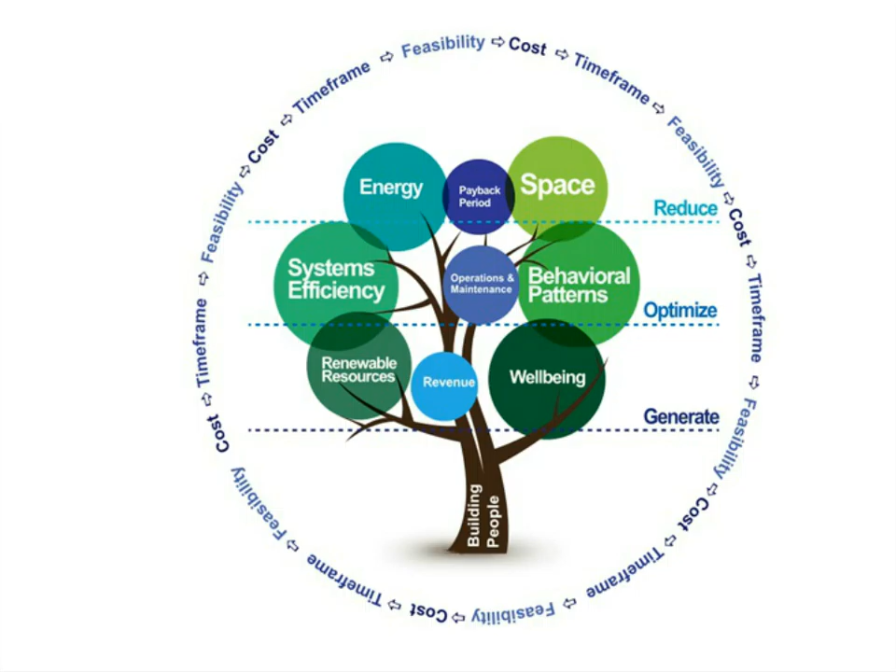Once we do that, our second step is what we call reclamation. The general idea is that once you put energy into the building, you don't want to let it out. You want to capture it and reuse it over and over again.

Once we have considered all the reclamation strategies that can be incorporated, we jump to what we call absorption. All buildings are surrounded by energy—energy streams that flow around the building, hit the building, travel underneath the building. Part of the strategy is to tap into those energy streams, draw them into the building, and use them for the benefit of the building's operation.

Once we've done those first three things, we've reduced a building's energy consumption down pretty much as far as it can be, getting it to a low EUI, energy use intensity. Once you've got that very low EUI number, it's time to explore the generation strategies—looking for opportunities to put renewable energy systems onto a building to generate power to equal or exceed the amount of energy you're still consuming within the building.

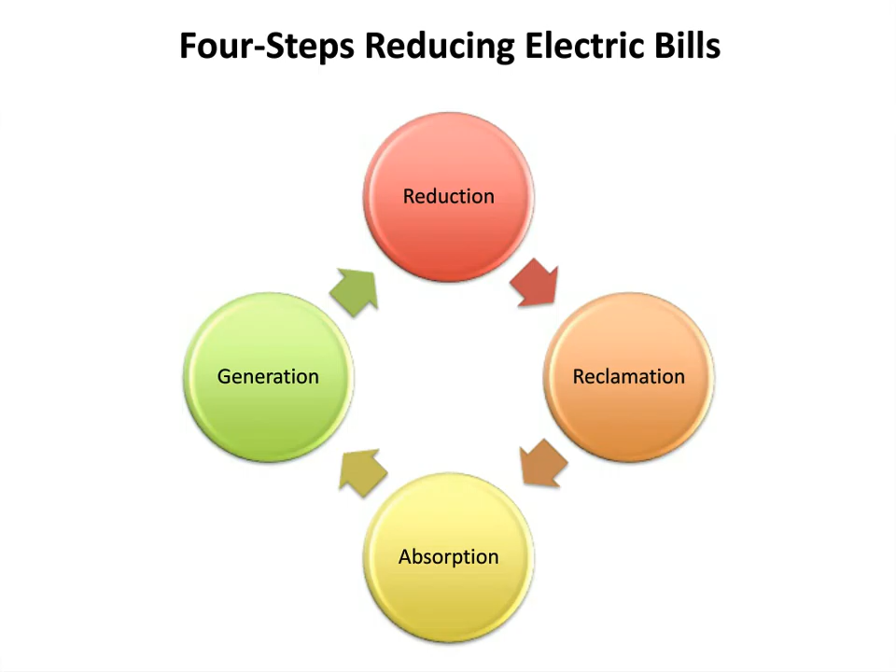So I'm going to talk quickly about one case study of where we've done this, or are doing this, locally. It is for a building called the American Geophysical Union Building on Florida Avenue.

We started the process by really exploring all the different energy conservation strategies we could think of. We started with a list of about 40 or 50 of them and analyzed every strategy independently. We even wrote individual white papers on each strategy considered, looking at everything from how much energy you could save, to what it would cost, to the availability of the products, to

competition, to other examples of where these strategies have been used in the U.S. and abroad, and eventually came down to a much shorter list of what we call our bundled strategies that would be used in the building.

So if you're not familiar with it, this is the image of the AGU building, headquarters building, which sits on the corner of 20th Street and Florida Avenue, Northwest.

The very first thing we had to do is essentially turn the building from a real building into a digital building, so that we could do a bunch of digital analytics to understand exactly how the building operates initially, and how each individual strategy considered would impact energy, water, and gas consumption on an hourly, weekly, monthly, and annual basis, to have a strong predictive tool.

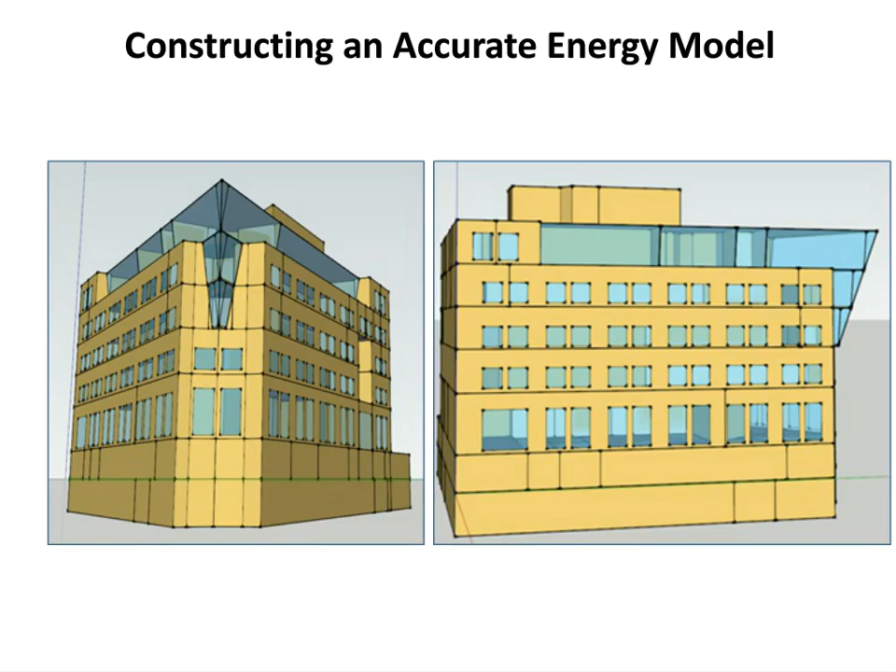So the numbers are not exact, and they never can be when creating digital models, but statistically these numbers were close enough for us to say that the real building and the modeled building are statistically equivalent.

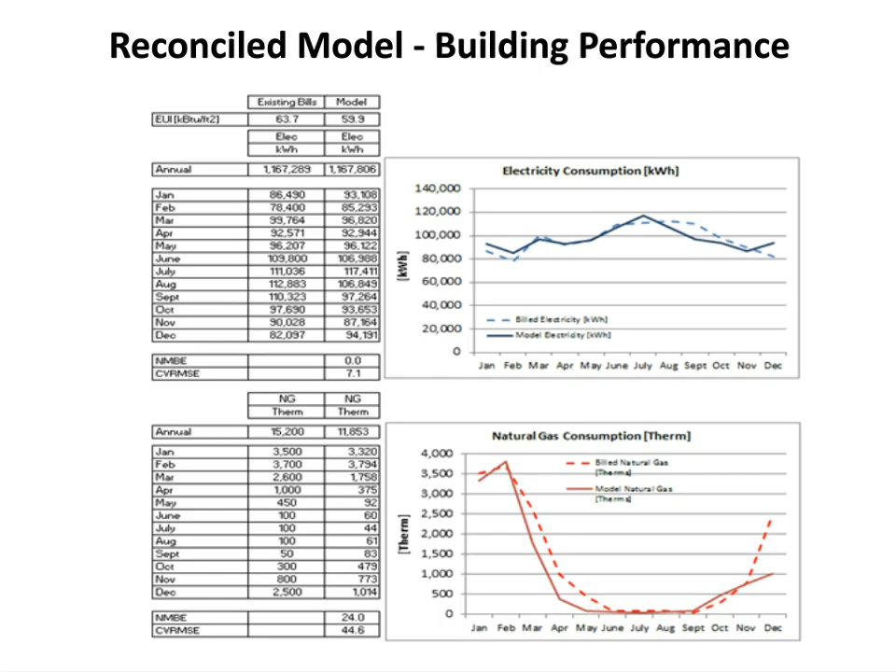So again, there is, I would say, no single magic bullet to get a building to low energy, to zero energy, and to positive energy. There's no one system you can select that gets you there. It really does take a combination of a number of different strategies from all of those four food groups I mentioned earlier: reduction, reclamation, absorption, and generation, paired together and working together to achieve that mark.

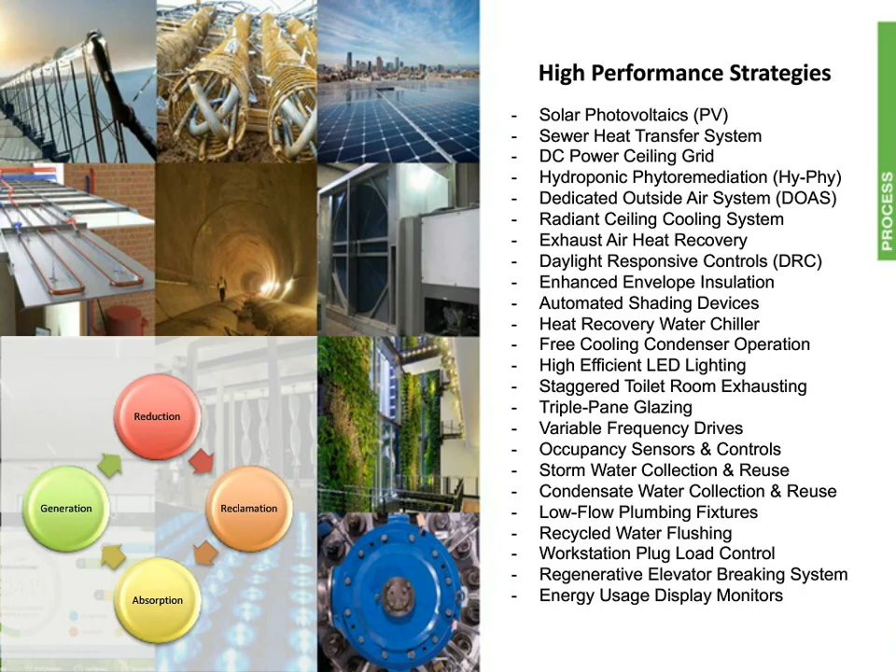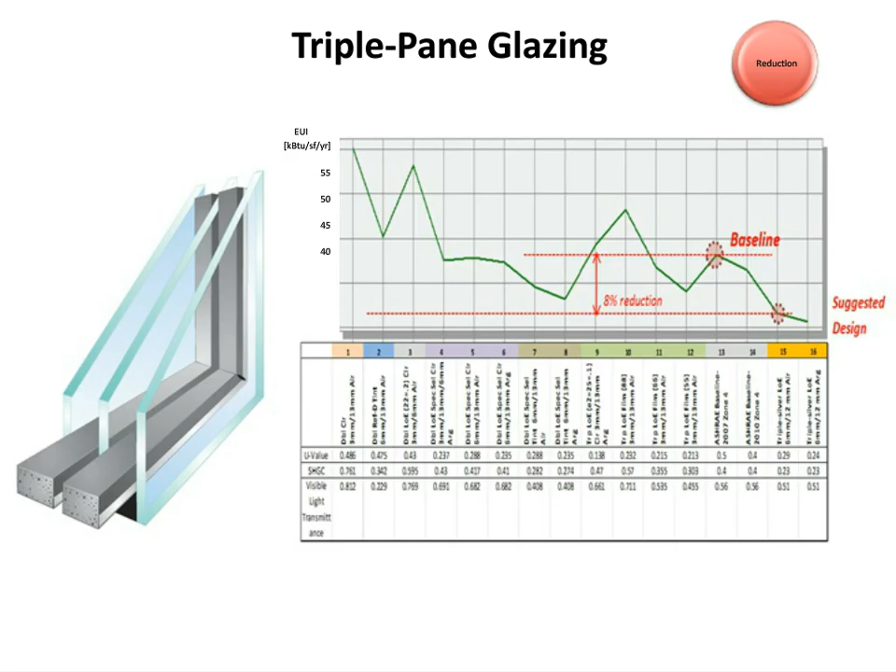So one of the first and very important elements are the windows in a building. Compared to a building's exterior wall, so much more energy is lost and transferred through the glass, so having very good glass is a very important piece of the overall approach. In this particular building, we are using what is called triple pane glass, three layers of glass with very high thermal performance and very good solar heat gain performance. That is a reduction strategy, reducing the building's energy consumption.

The next system being installed into this existing building is what's called a radiant ceiling cooling system, considered by many in the U.S.

This may appear to be a very cutting-edge advanced system. However, it's not really. It is a system that has been used very consistently and reliably by the Germans for more than 30 years, but now is being considered more frequently in the United States. This system uses water to create a cool surface for the entire ceiling plane to have a radiation exchange with people in the building, providing a much higher level of thermal comfort. It's a very quiet system, and it leads to extreme reductions in energy consumption compared to conventional air handling unit type system designs.

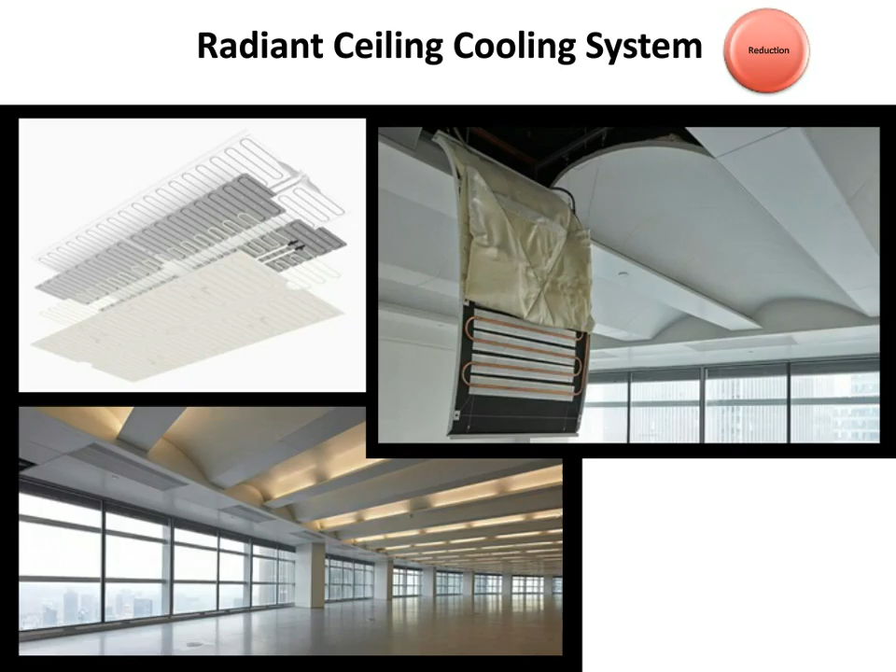Lighting is also very important, and LED, light emitting diode, fixtures are becoming very common and are used quite frequently now in the Washington, D.C. market, which is great to see. Again, a significant reduction strategy.

Within the AGU building, we are using something which is, I believe, quite innovative, and that is the grid that holds up the ceiling and holds up these radiant panels. The 2x2 grid is, in fact, electrified. We have DC current running through the grid, so all of the light fixtures within the space and many of the other devices within the building use the DC energy by clipping directly onto that grid.

The reason this is so significant is the building is also powered by a photovoltaic system, and PV, photovoltaic arrays, generate DC power. Quite often you may hear that PV has very long payback periods, and the reason that has been true in the past is that the power these grids generate, DC, needs to be converted into AC power to be effectively used in office buildings. So this approach changes that trend, where we're taking the direct current from the photovoltaic cells directly into the building and using that power directly into the light fixtures and other devices without having to go through that transformation and all the energy losses associated with converting it into AC power.

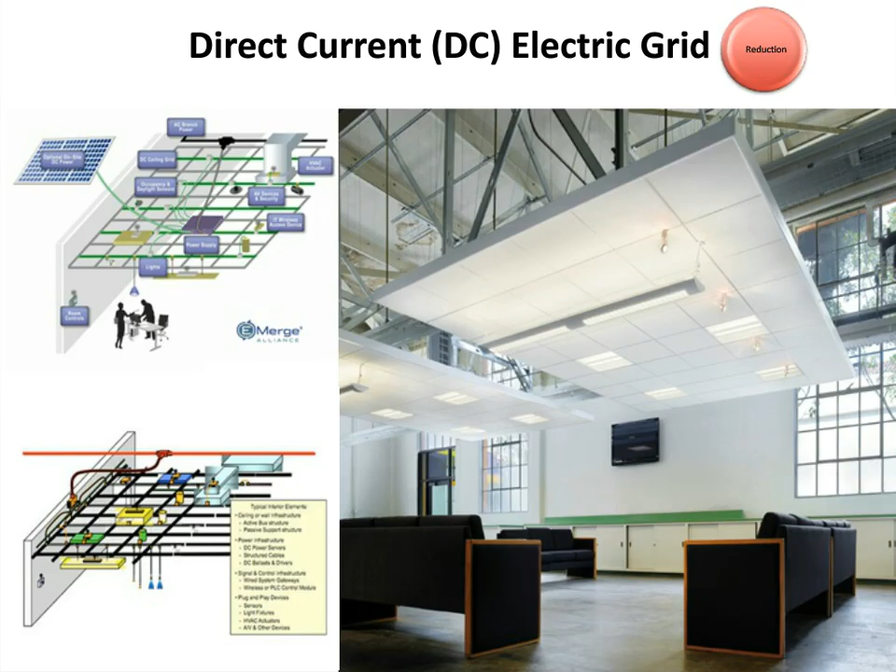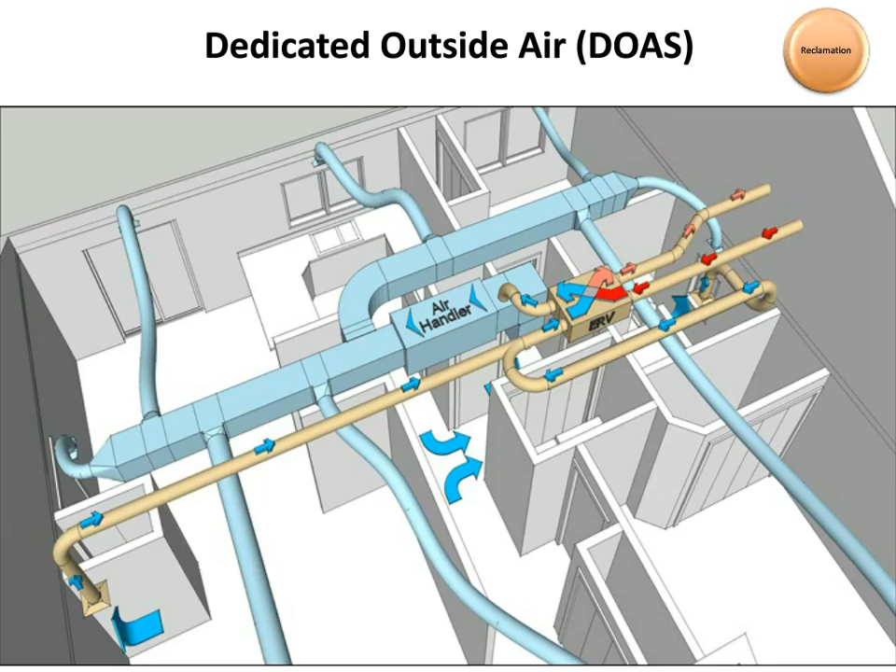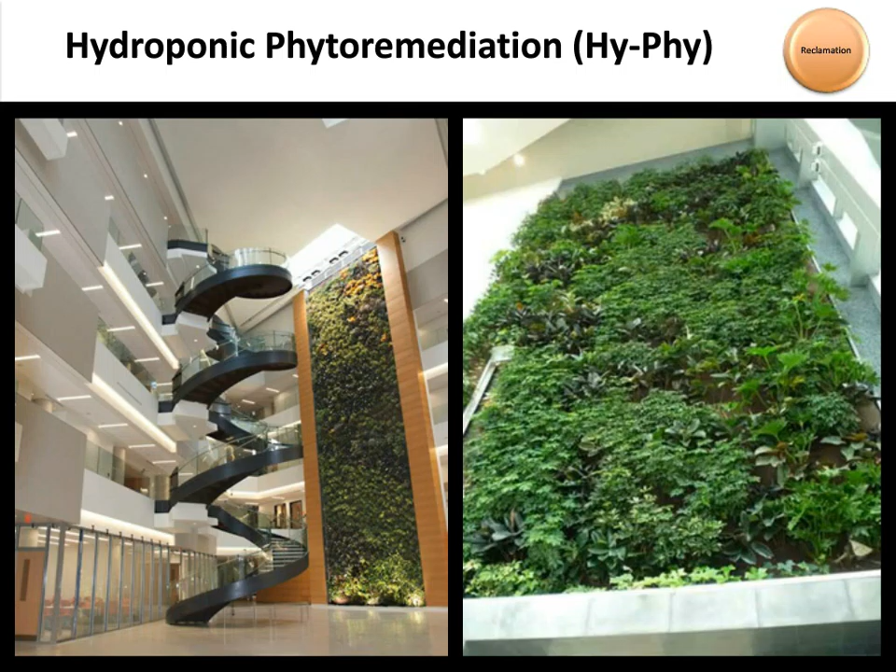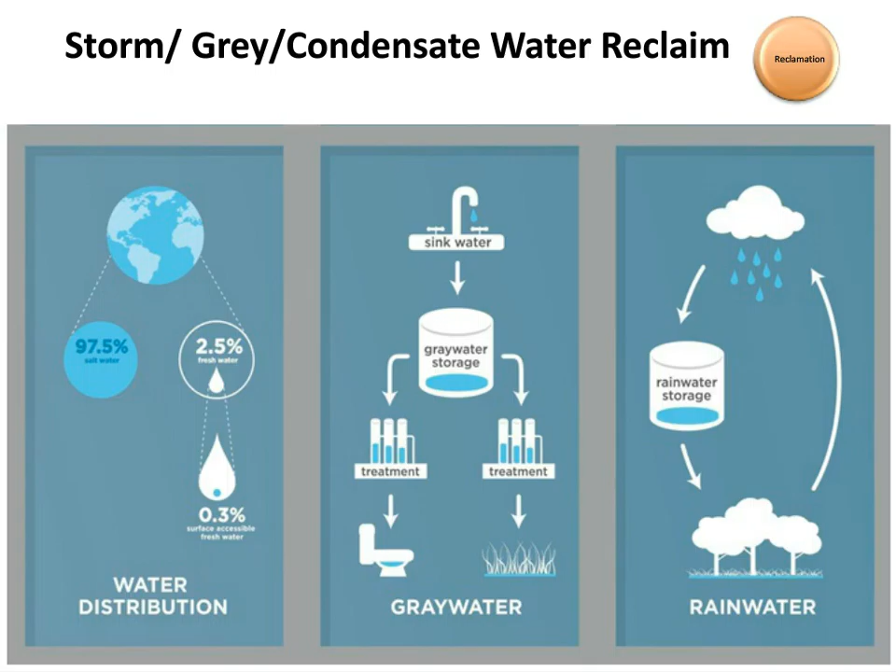Water cannot be overlooked. There are new stormwater regulations within Washington, D.C. that require you to capture rainwater on the roofs of buildings. Within our project here, we're taking that one step further. Not only are we capturing that water, but we are reusing it. The stormwater that falls on the roof is filtered, cleaned, chemically treated, and then we use that water for flushing all the toilets within the building and for all the irrigation needs surrounding the building.

The radiant system that I mentioned earlier also eliminated the need for cooling towers on the building. So essentially the only water coming into the building from the city is that required for sinks and showers, more than a 90% reduction in total water consumption.

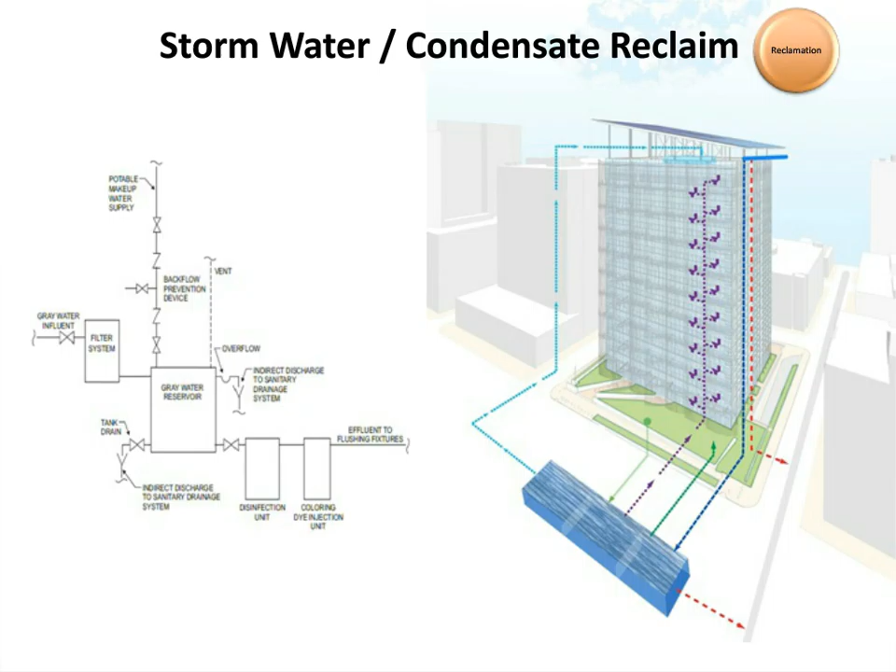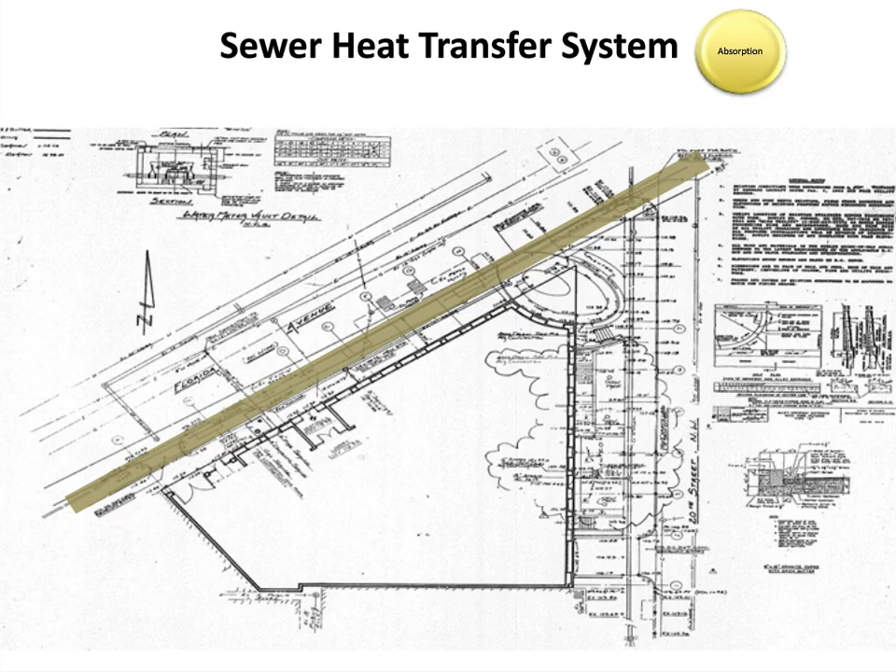The next system is an absorption strategy. I mentioned earlier the ability to tap into and extract energy from streams around the building. Well, this is a perfect case of that. Directly in front of our building, 35 feet under the street, is a combined city storm and sanitary line. We are burrowing down into the earth, tapping into this line, extracting fluid from it, and then using that fluid as a heat transfer medium. Essentially, we are using the city's sewer system to heat and cool our building.

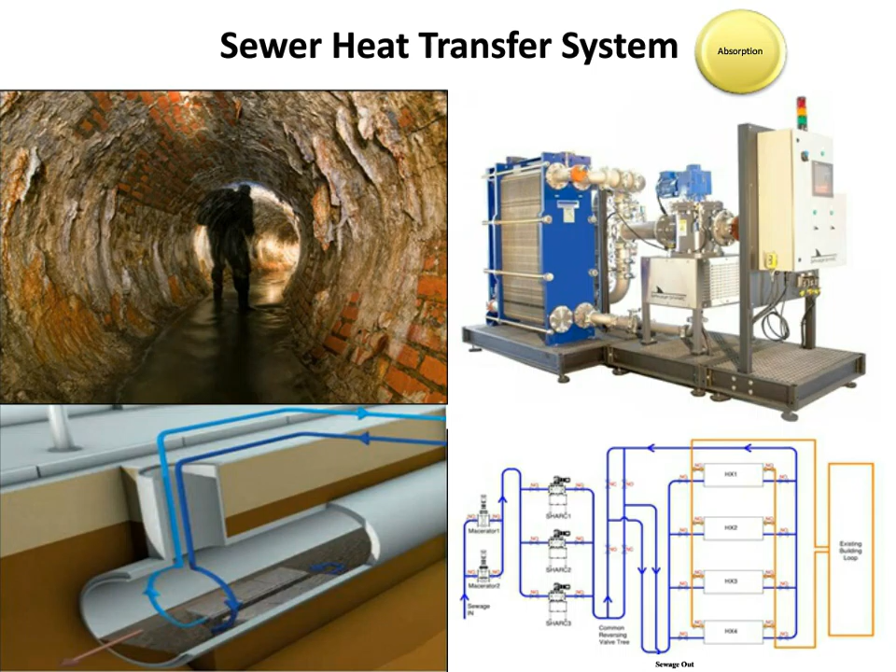And in addition to— Roger, sorry to interrupt. Yes. You have about a minute or so left. Yep, I'm down to my last couple slides.

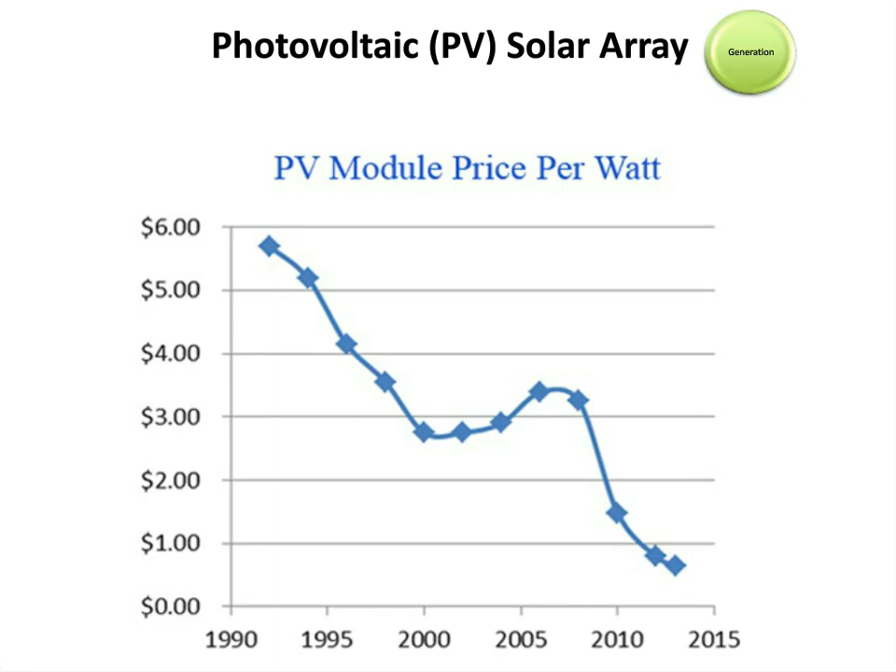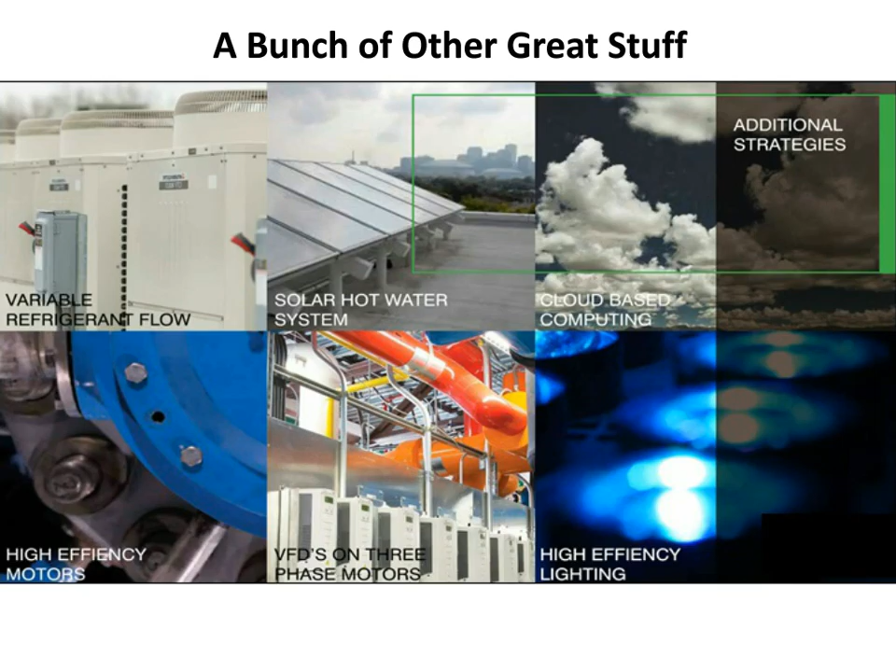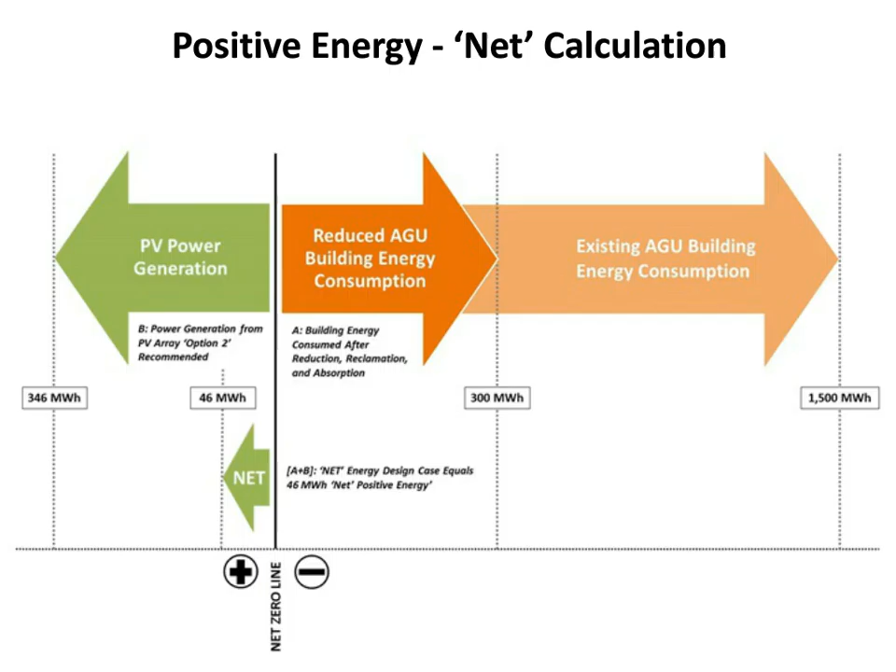In addition to those strategies I mentioned, there are probably 20 others or so that all add up to that performance. This is the graph of what happens on the project. The long orange bar to the right shows how much energy the building used to consume. The shorter orange bar shows what happens when you employ all of the reduction strategies. Then when you add the generation from the PV, the net outcome is a positive 46 megawatt hours. So essentially, the building will push energy back onto the grid, and receive a check from the utility company each month for the power it has generated. So with all this extra money, you can enjoy your dinner, have fun, relax, and celebrate having achieved a positive energy status. And that is the end of my presentation.

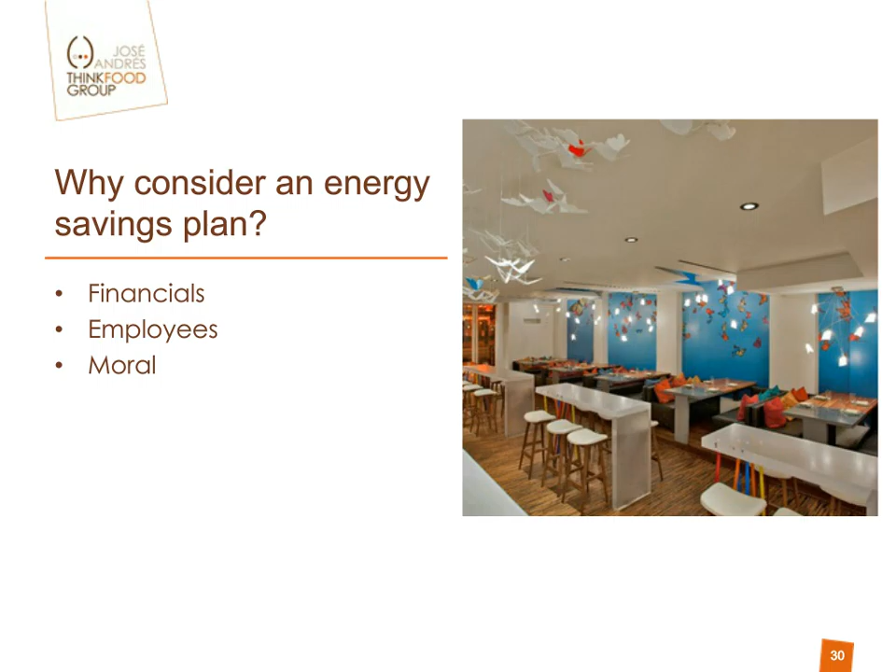What we looked for first was a consultant, since we could in no way, shape, or form do this ourselves. I can teach people how to take care of others, how to flip a steak, and those types of things, but certainly not how to calculate energy savings. So we interviewed several consultants and settled on a spectacular person who happens to be the CEO of Energy Sherlock. What we were looking for was truly somebody we felt was a partner, who really wanted to collaborate well, understood what we did, what our industry was about, could provide service at the same level we do, was sensitive to things like working overnight, cleans up after himself, and understood the particular needs—whether it be how a dishwasher works, the needs of the employees there, the makeup air, the air conditioning, and the needs in different parts of the dining room—so that it was a seamless change.

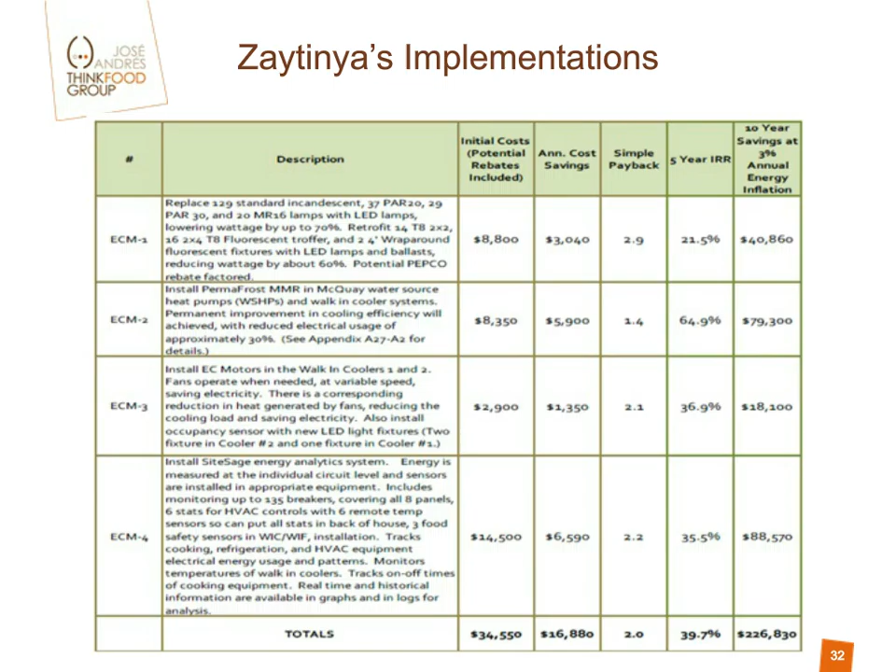In terms of roadblocks and lessons learned, there are many - restaurants are intense, there's a lot going on in every square foot. And the design issues - if we just look at light bulbs - anybody who knows we're about to roll this out into all restaurants, including China Chilcano...

The first thing you'll notice when you go to China Chilcano is the vast array of light bulbs, designer look. So when we're looking to move to a more energy efficient light bulb, just making that hurdle was a challenge. There are many other design issues that can be a challenge, but that's a good example.

The locked temperature controls pose some challenges with guests arriving at that right temperature, so we had to play with that for some period of time. Different stations too - for anybody who knows how to cook on a wok, or what a dim sum station looks like - and the water usage.

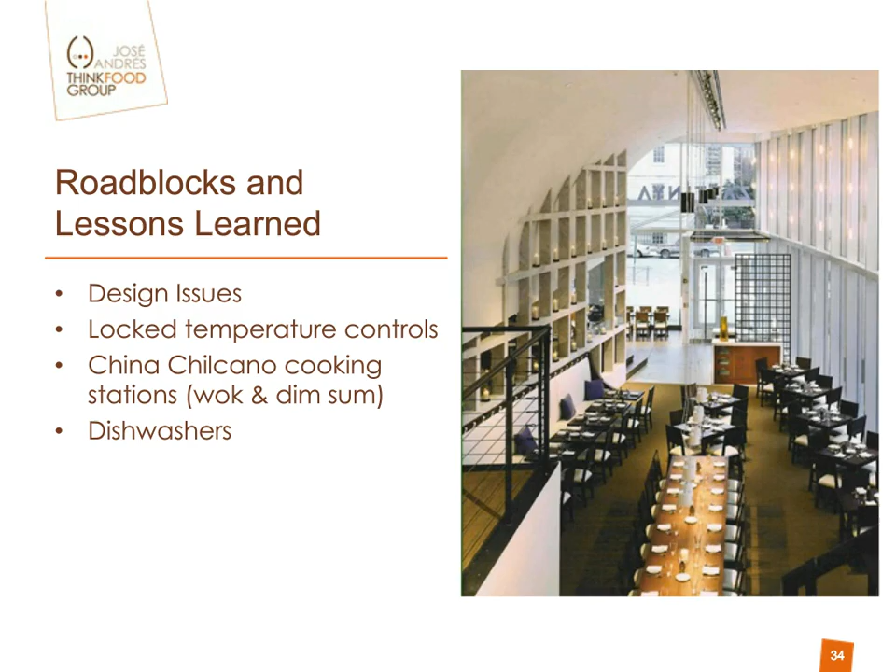These are great presentations looking at how to save energy on a very broad level across your restaurant or within building design. I want to go through some things we've seen and help restaurateurs implement on a day-to-day basis - the quick, easy steps, often very low or no cost to implement directly.

First, about the Conserve program and the National Restaurant Association, if you haven't heard of it before - we're part of the association itself, which represents all of the restaurants within the United States, about 1 million of them. We do a lot of research and outreach communication for the industry. We also have 53 state partners when you include Puerto Rico, Guam, and the District of Columbia. Any member of the state association is automatically a member of the national association.

With Conserve, we're really trying to inspire environmental action within the restaurant community. We have about 80 videos on YouTube, both inspiring interviews and best practices themselves. We have a lot of blogs and a monthly newsletter that we put out, so I'd be happy to sign anyone up that's interested. We also perform research, and a lot of what I'm going to talk about here is taken directly from energy and water audits around the District of Columbia.

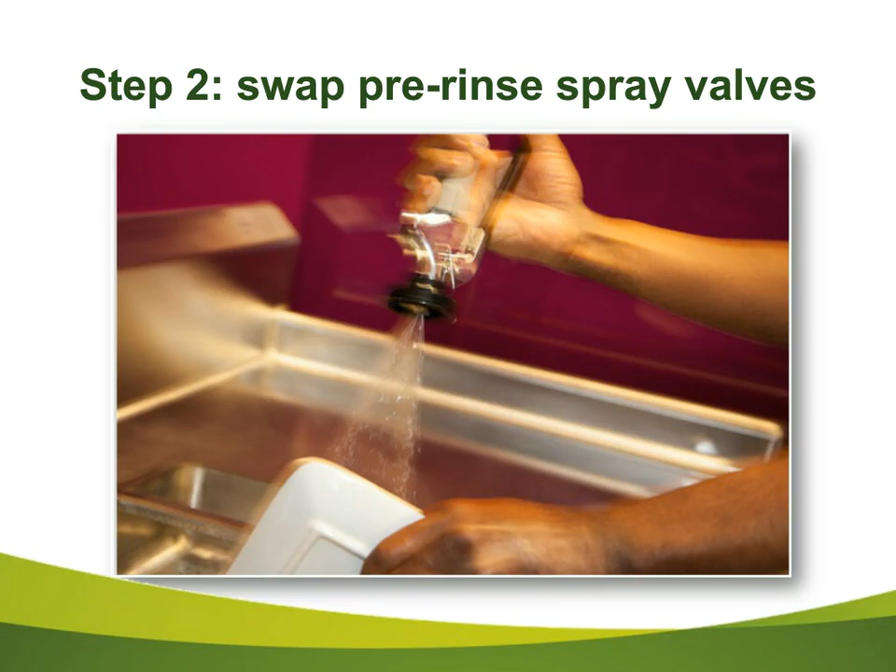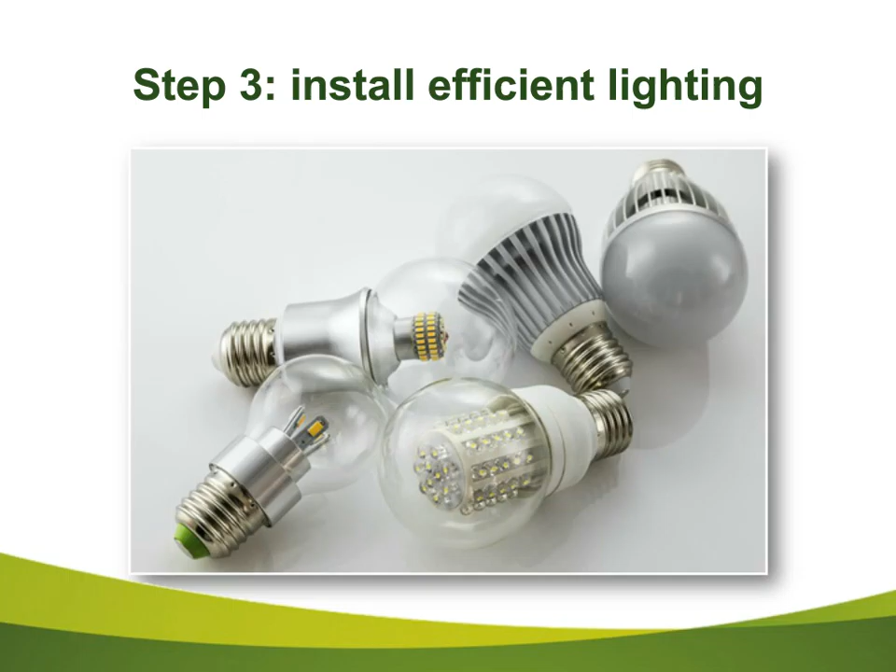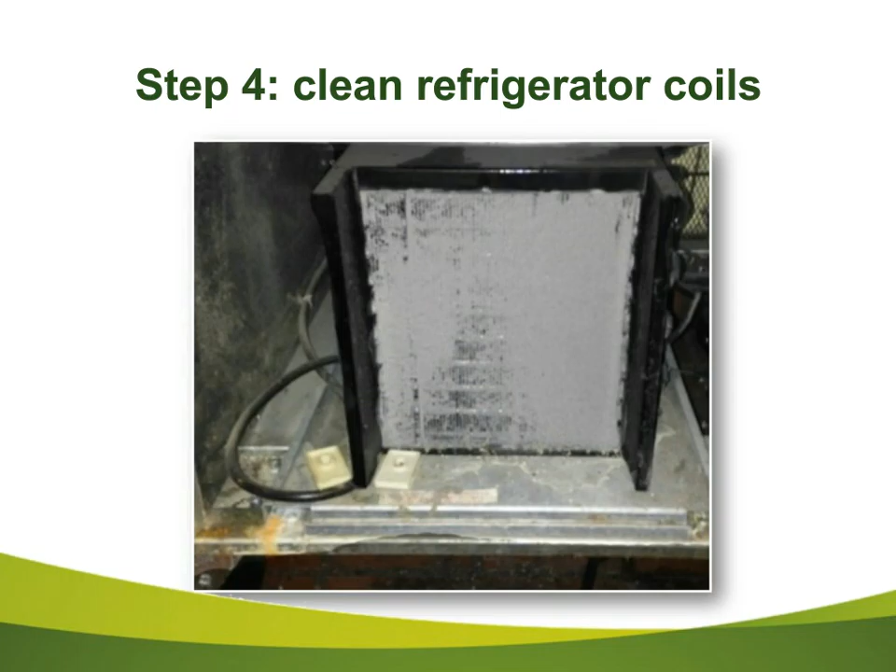Step 5, insulate hot water pipes. You're heating up the water, paying for it, and as it runs through the pipes, they radiate heat out and you're losing money, simple as that. There are often rebates for this too. For every 6 feet of material it may cost you $2, but you'll save real money, a couple dollars per foot, and you could insulate the lines in about 20 minutes. Very simple.

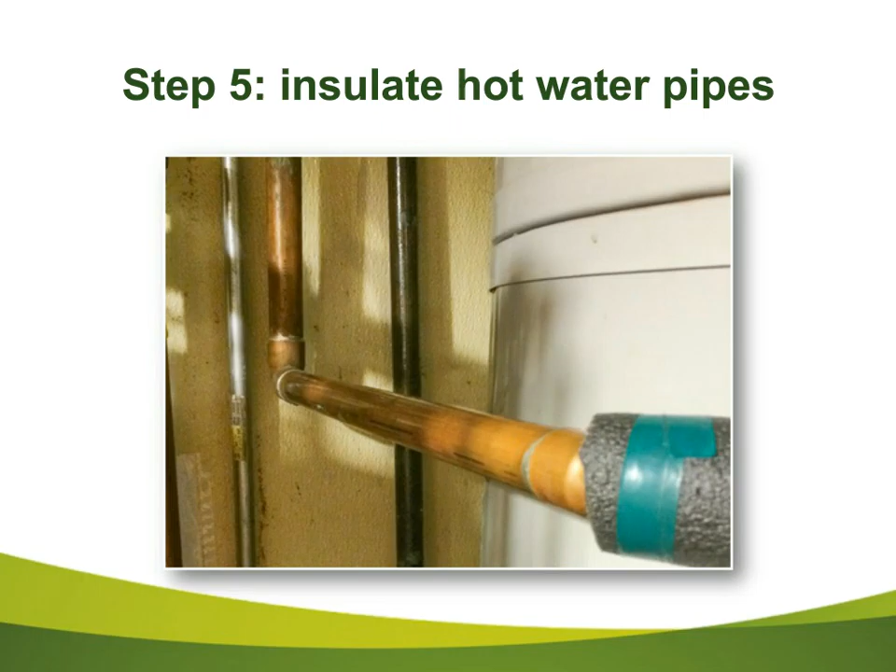Lastly, number 6 is a startup shutdown schedule. Just like a car, you wouldn't want your commercial food service equipment - a fryer, oven, or griddle - just sitting there idling for no reason. I've gone into restaurants and seen, at 3 o'clock in the afternoon between lunch and dinner shifts, a full broiler on full blast shooting heat and natural gas into the air with no customers in the restaurant. The whole thing could have been shut down, but if you're worried about startup time, just turn off half of it - you can still make a hot dog, hamburger, or steak on the other half. Really intensive equipment might take 30 minutes to heat up, but usually it's about 20 minutes for a fryer, so just time it and tell your kitchen staff. A great example is Shari's Cafes and Pies out in Oregon - each of their dozens of locations saves about $4,000 a year just by turning equipment on and off at the appropriate times.